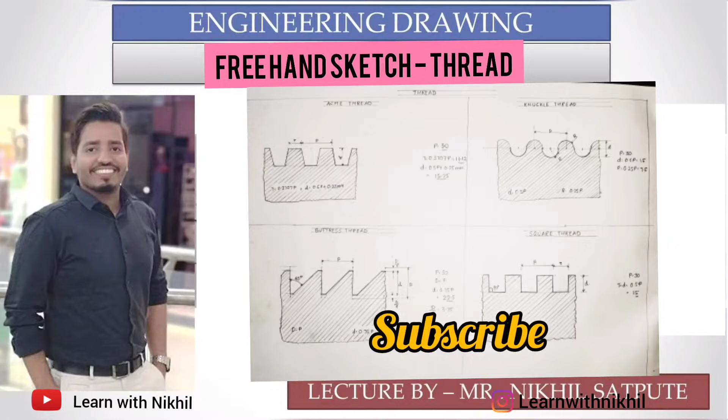So here we are going to draw a freehand sketch, and in that we are going to draw threads. First is Acme thread.

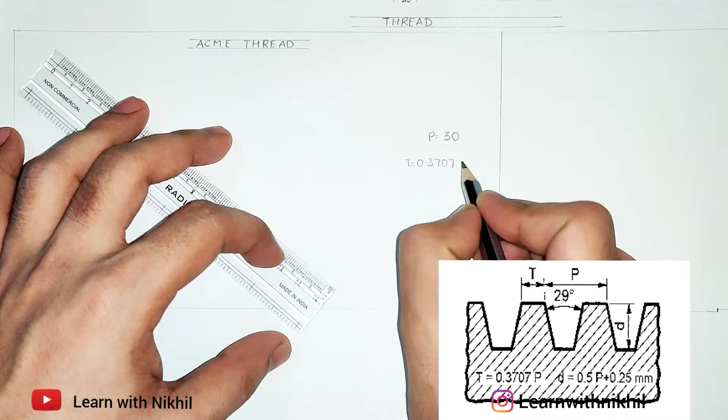First we'll find out the values. The image shows P is 30, we have assumed that, you can assume any value. After calculating T, that is 0.3707 P, it will be 11.12 millimeters, and small d, that is 0.5 P plus 0.25 mm, will be equal to 15.25 mm. So we have assumed P and calculated the other values.

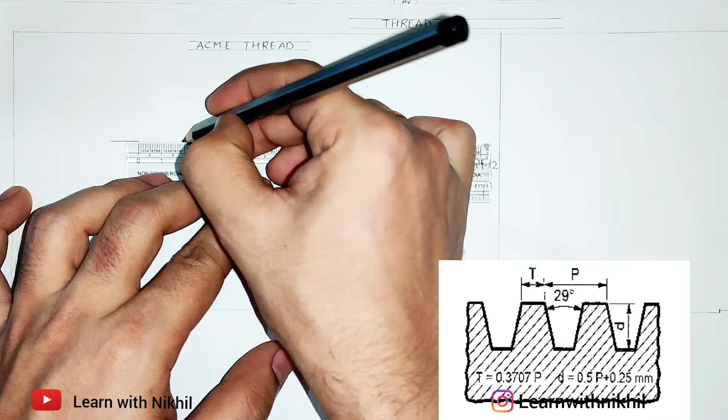You can assume P as 20 millimeter, 40 millimeter, anyhow, and according to that the values will change. Now first I marked a line T, which we calculated as 11.12. Then from T we marked a point at distance P, that is 30, and again marked a line of T. So these two lines are T, as you can see in the question itself.

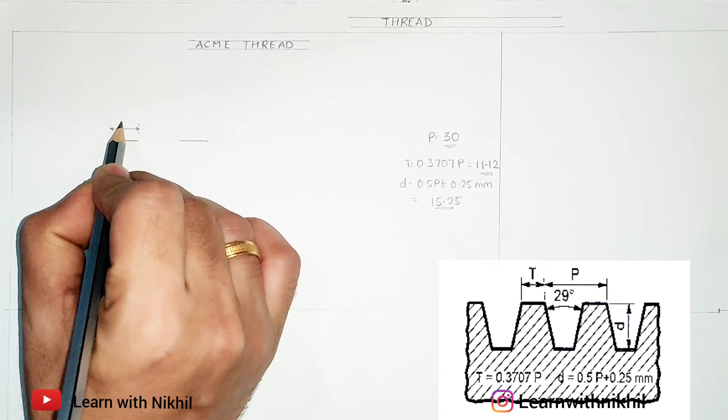So this distance is T. Till here the distance is P. So first we have marked these two distances.

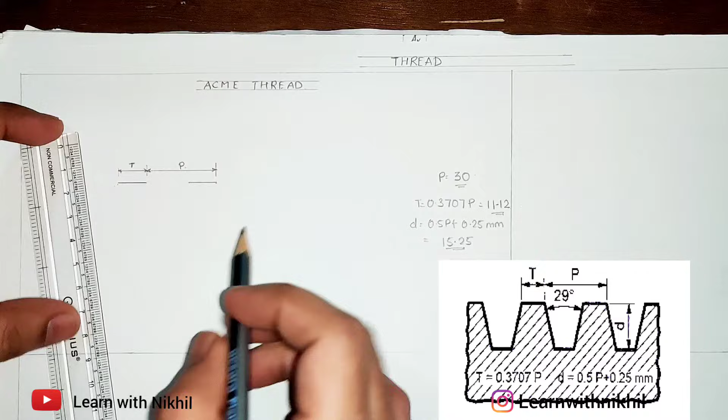Now we'll mark a distance D, which is 15.25, below this line. You can see in the question also. So I've marked a point, and now I'll draw a parallel line through it.

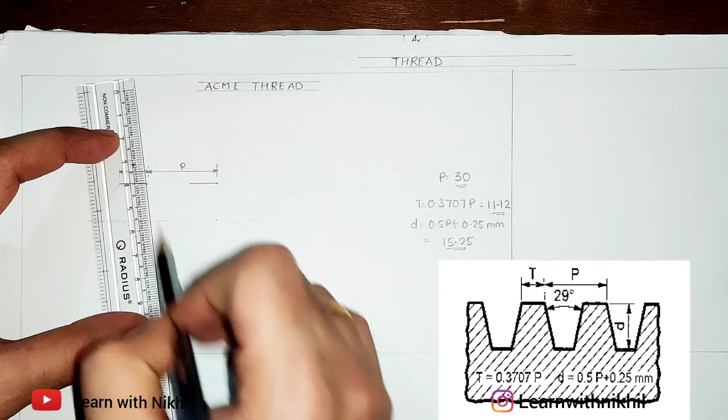Now we have to draw an angle of 29 degrees, V shape. So first I'll mark a center point of this, and through that center point I'll draw a straight line.

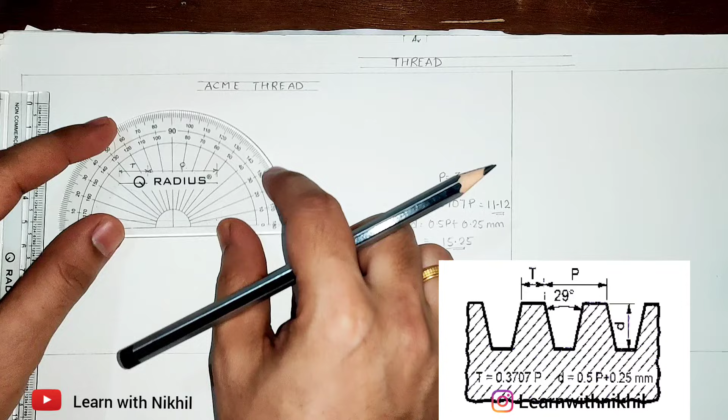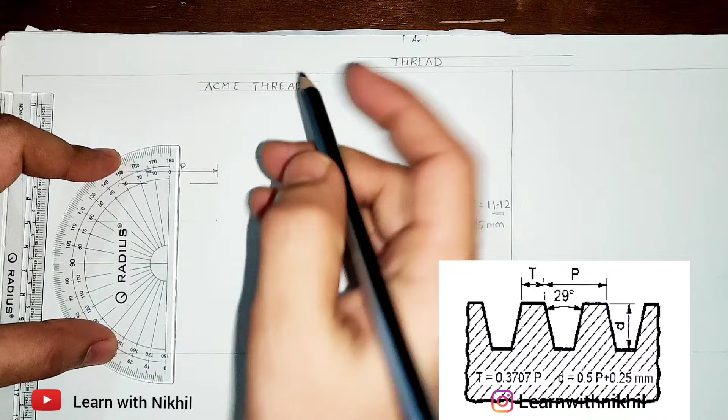We have to draw an angle of 29 degrees, so 14.5 degrees on both sides will give me 29 degrees. I'll just place the protractor like this. You can place it so you get the angle 14.5 on both sides. The top part I am aligning to 14.5 degrees, as you can see.

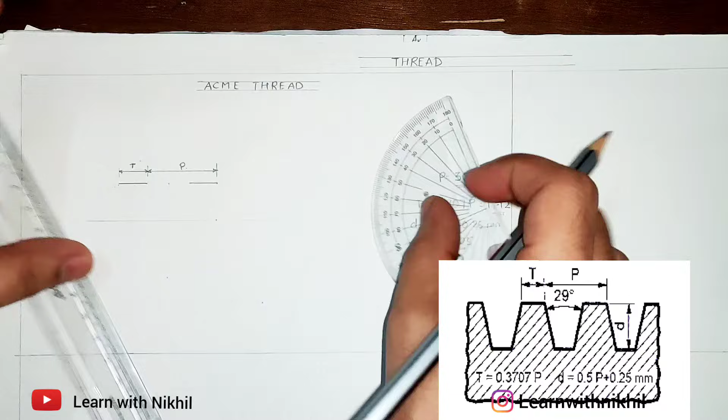Once that degree is achieved, I'll mark a point. I'll note the center point also of the protractor. This is the center point, so I'll mark it there, and from there I'll draw a dark line joining till this distance D. I'll do the same on the other side.

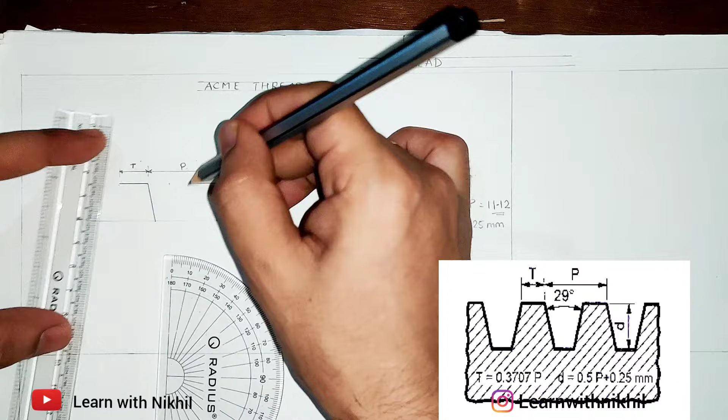Now we have the center point, so directly I'll mark the angle 14.5, joining this. Given the angle, the bottom part I'll join, and this groove we have got.

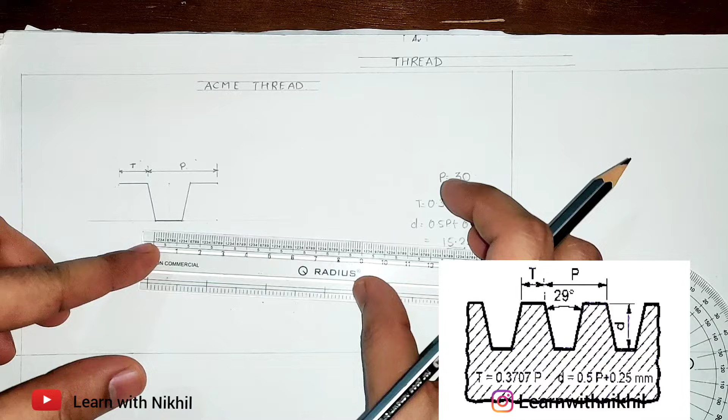Same way we'll construct it on the right side and on the left side as well. Now you don't have to calculate the degree again, we'll just find out the distance and replicate it on both sides. So this distance is around 16 or 17 millimeters, as you can see.

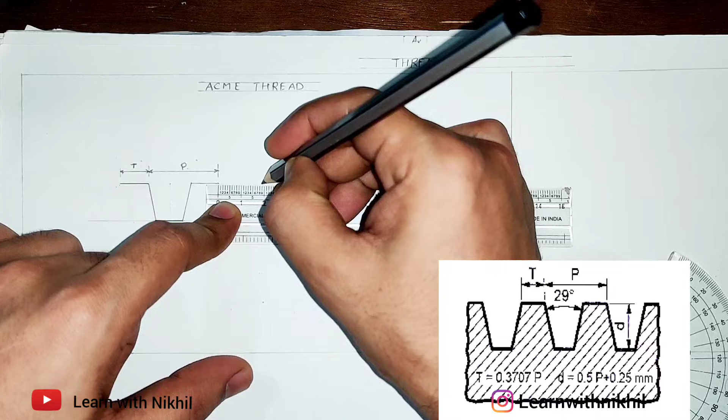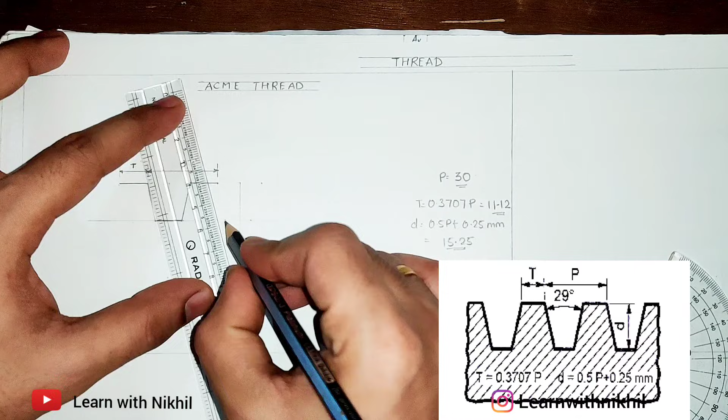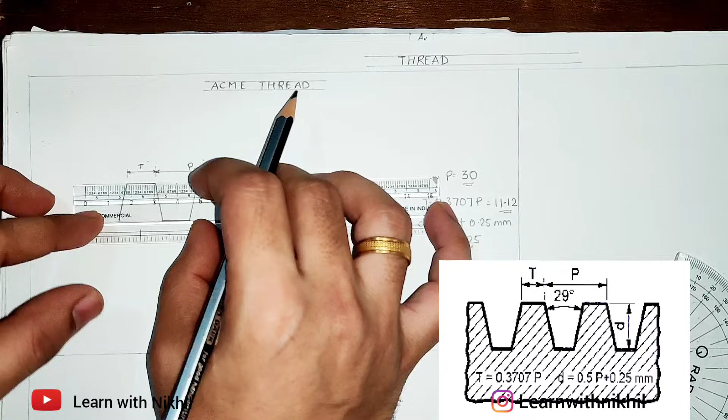So this is how, once you create the angle, just through the distances you can recreate this. Now we'll do the same on the left hand side as we did on the right side. See this distance, mark it over here, mark the center point, join this.

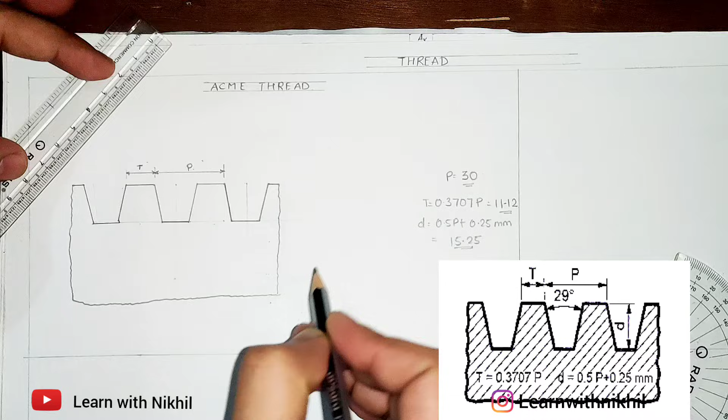Now creating the outer surface, which is an uneven surface. It is an extended surface, so we are just marking it like this. This distance is small d, and we are done. Just write down whatever is given in the question, same as you have to draw.

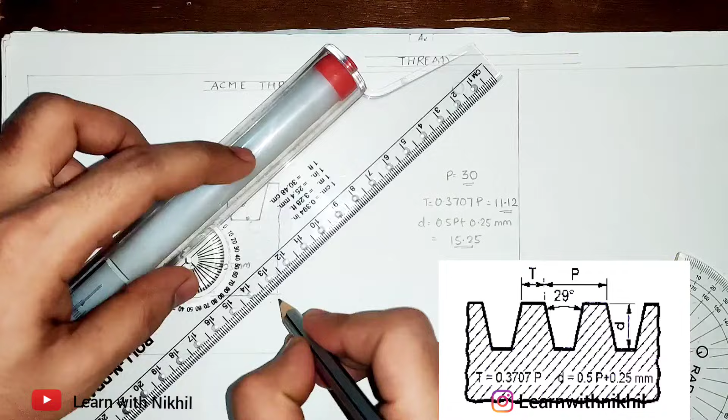Now this slant line I have taken at an angle of 45 degrees. Just see how consistently I am drawing it, the gap should be the same, and we are done with this figure. Next is knuckle thread.

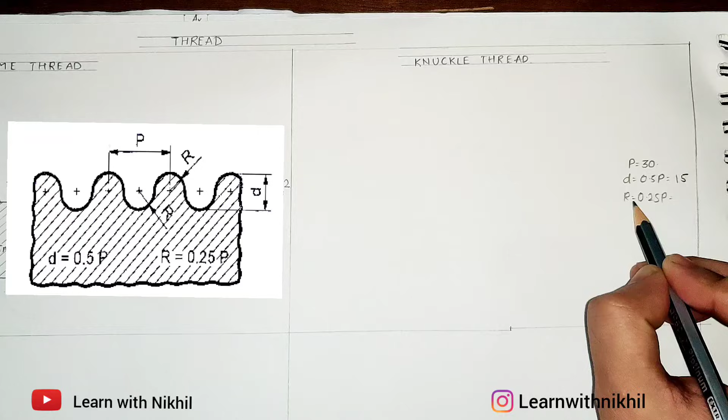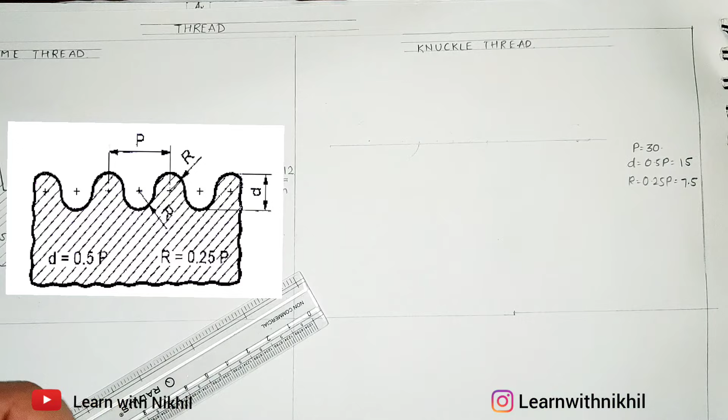We have the dimensions P is equal to 30. D we have calculated, and R we have calculated using the formulas. Now I'll just show you the shortcut method to draw this. First we'll draw a straight line.

Now on the compass we'll take a distance of R, that is 7.5 millimeters. I'll keep it on this line, and anywhere on this line we'll draw the semicircle on the top side. Where it ends, from there I'll mark a center point, and from that center point draw the semicircle downwards. Where it ends, mark the center point again, draw the semicircle upwards. So like this, continue drawing.

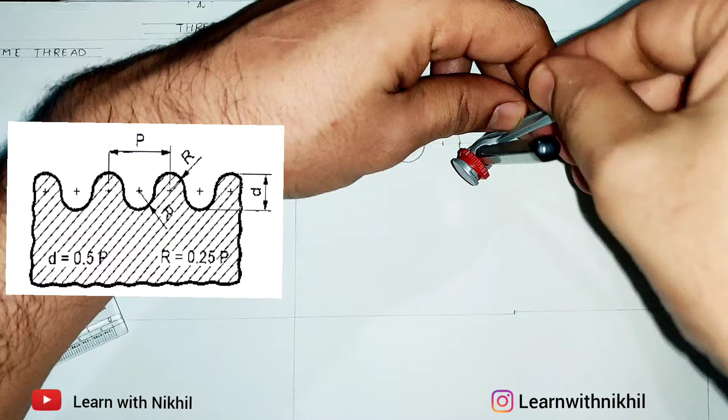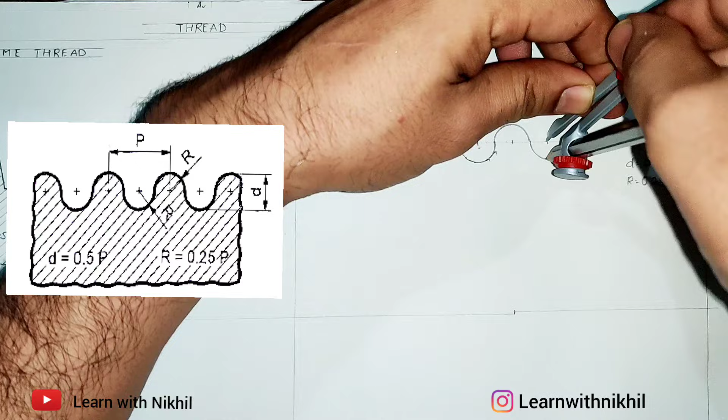So we don't need to draw P or D separately, they will automatically form if you do this correctly. So 7.5 millimeters radius semicircle we have created. After creating this, you can check the value of P and D, it will be the same which we have calculated.

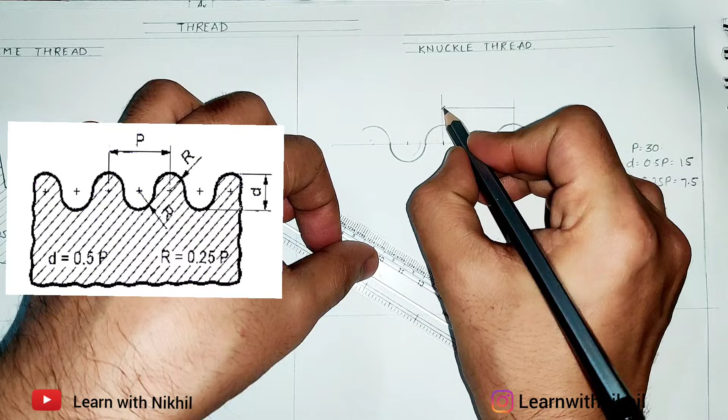So P value is 30, as you can see, it's already there. The height D is already there, which we have calculated. So this value is P, this is R, that is 7.5 radius, this is also R, and this height is D.

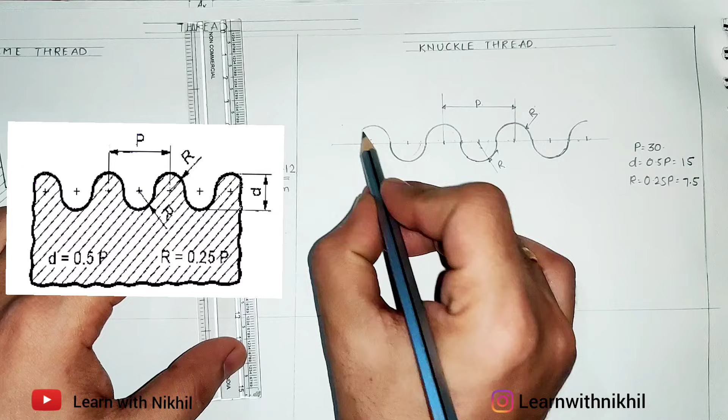Let's draw the last semicircle, then draw this uneven surface. As it is extended, there is no end to this, so we have drawn it like this.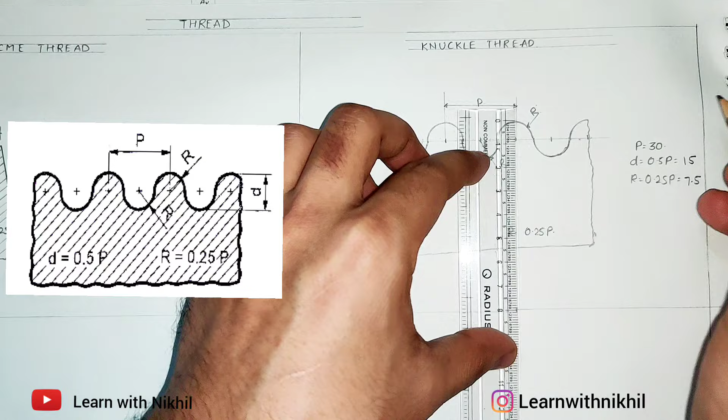Now D value is 15 millimeters. You can see it is exactly 15 millimeters. I'll just mark it. You just have to draw the radius of 7.5 and you will get the other dimensions automatically. Again drawing this 45 degree sectional or hash lines. See how consistently I am drawing, the gap should be same. So with this we are done with the knuckle thread.

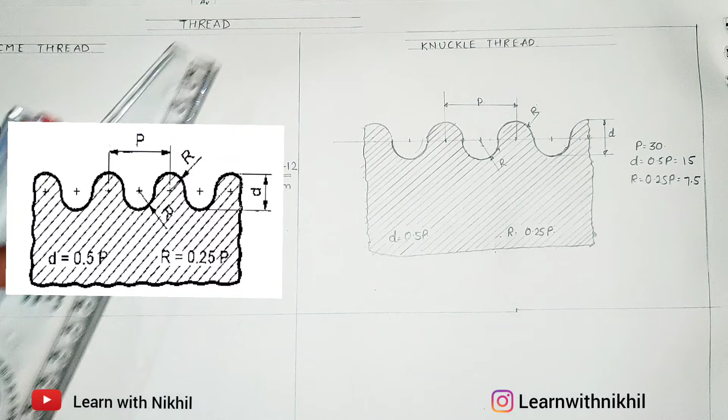Next we'll draw buttress thread.

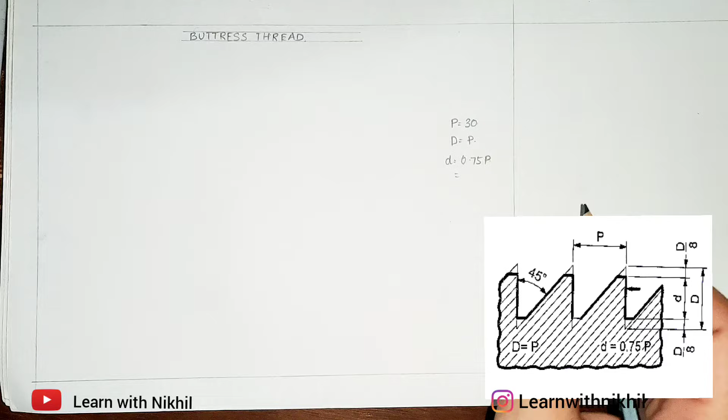Again its values: P we have assumed 30, D is equal to P, small d is equal to 0.75 P, which gives us 22.5 millimeter, and D by 8 is 3.75 millimeters.

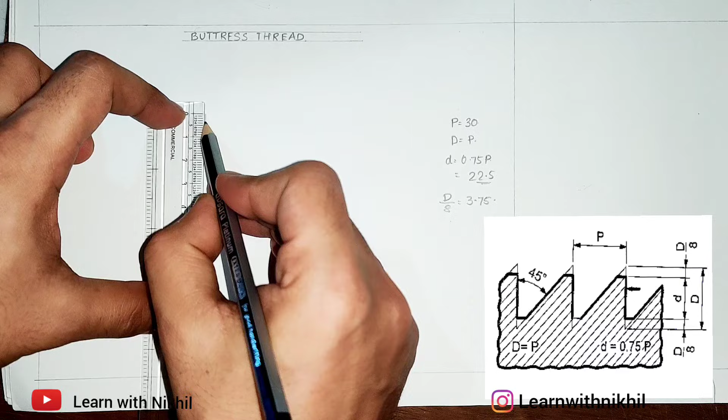So for drawing this, first as you can see in the question, D by 8 value is 3.75. First we'll mark 3.75, lightly. After that the value is small d, that is 22.5, so from here we will mark 22.5 downward, that will be dark, and after that below again D by 8, that is 3.75, that is light.

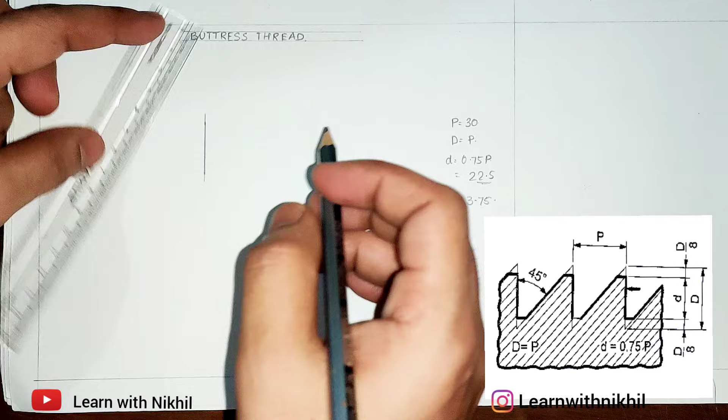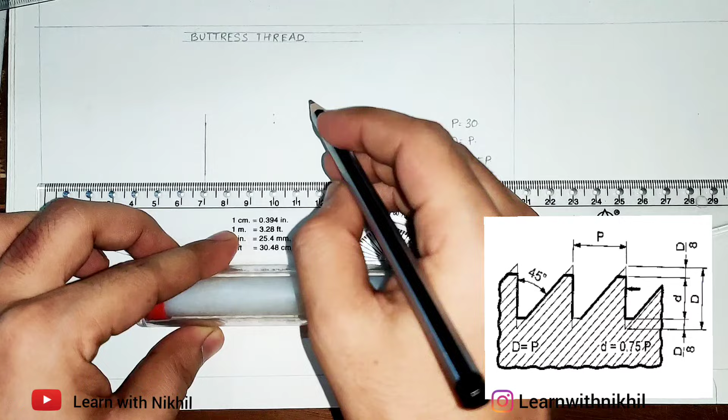Once we have marked this, same we will project it at a distance of P. P is 30 millimeters, so I'll mark a point 30 millimeters on the right side. From there I'll just project the points. This point I'll project it there. So same line we will create it 30 millimeters apart.

Same line, this will be light, D by 8. This will be dark, small d. Then again D by 8 light. Now these two lines have been created. Now we have been given an angle of 45 degree.

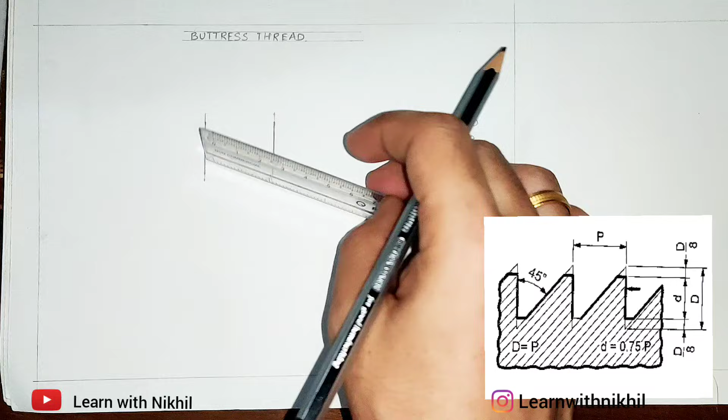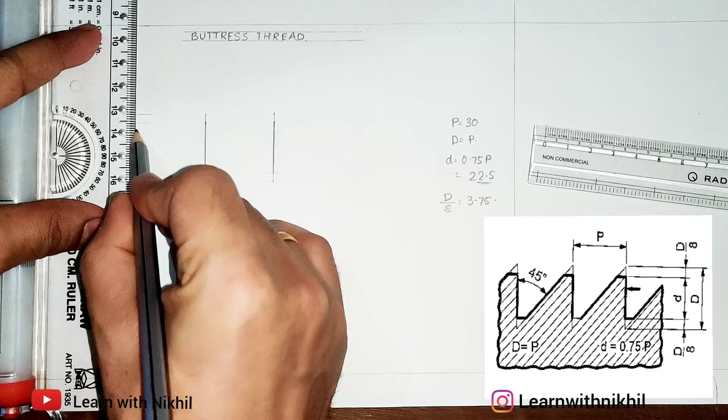So from here we have to draw an angle of 45 degree. Before that, I'll just replicate one more line on the left side also. See how I'm projecting these points on the left side. Then taking parallel on this line, this will be light, dark and light. Now 3 lines we have drawn.

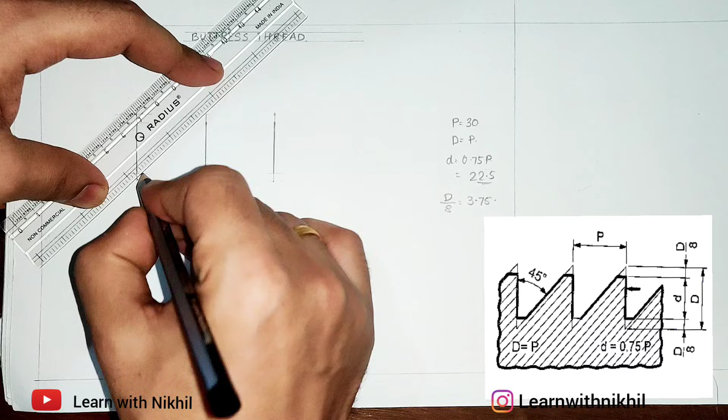Now I will take an angle of 45 degree, keeping the protractor like this. Angle 45 degree I have marked. Joining this, but see how the join is there in the question, only this part is dark. Then join like this, join like this. So 45 degree angle automatically forms.

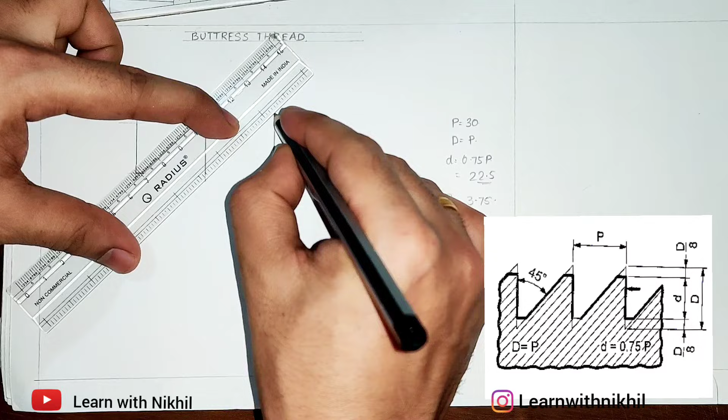So from here again I will show you 45 degree angle. It automatically joins here. We'll draw this part, make this part dark, then join this and this. Same you can do it on the further side also.

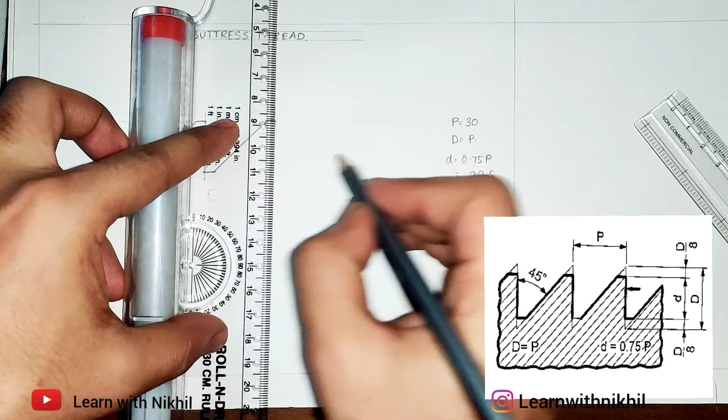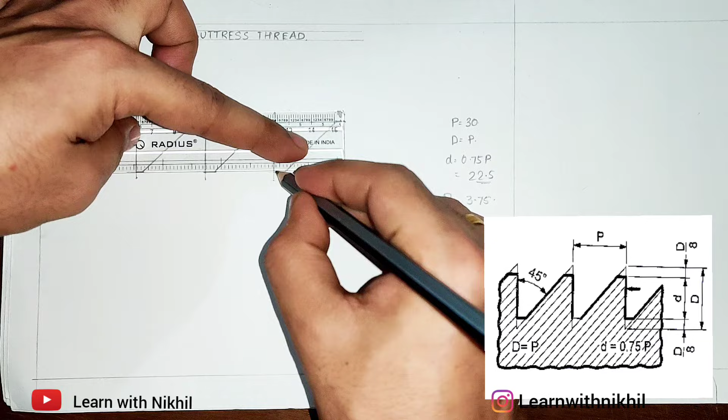I've marked 3 cm, that is P. Taking this line parallel here and projecting the points. Mark the points, this is D by 8, this is small d, and again D by 8. Same thing, keep the scale like this. Make this part dark, join this and the bottom side this. So this is the buttress thread.

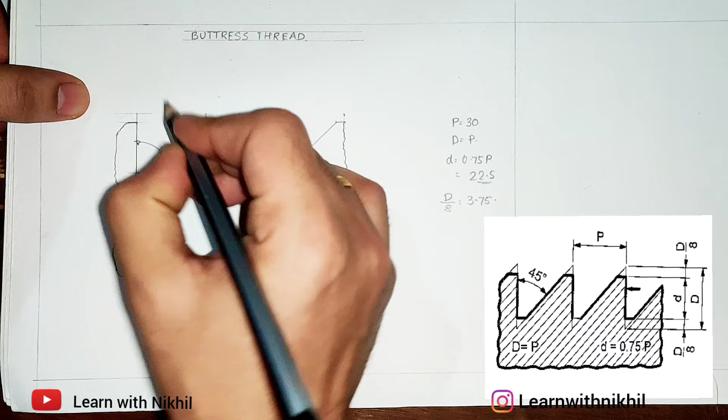Now completing the remaining part. Again, this is a continuous section, so to show it we are drawing like this. This angle is 45 degree. This distance is P, which we have assumed. You can assume the distance anything like 20, 40.

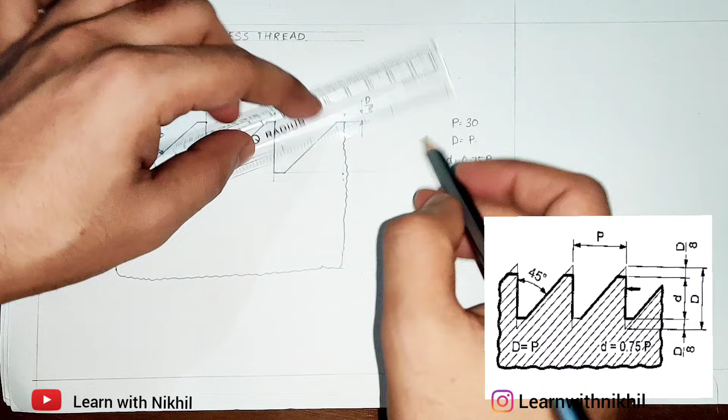According to that, the distances will change. This distance is D by 8. So whatever you assume P, according to that, the other dimensions will also vary. I have assumed it 30, you can assume it 40 or 20 as well. This distance is capital D, you can see it automatically comes to 30 millimeter. This is D by 8.

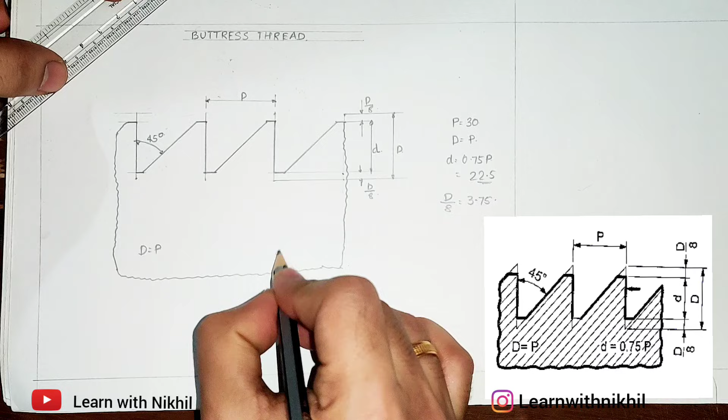Now completing with the remaining part, the section lines, and we are done. So we have drawn the buttress thread.

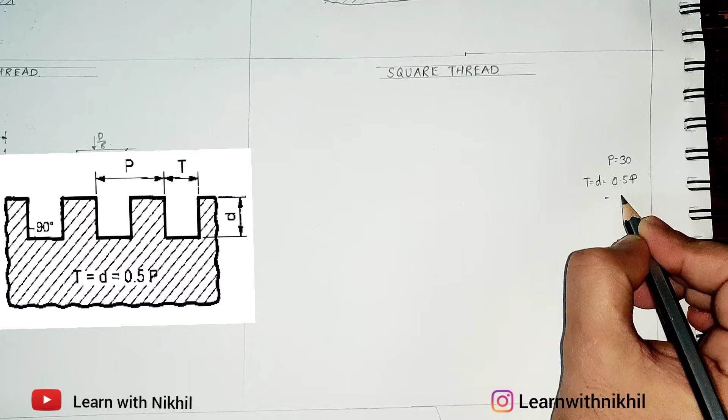Last is square thread, this is the simplest one. Again P we have assumed it 30. T is equal to D is 0.5 P, which is 15 millimeter. So we will mark the points 15 millimeter apart.

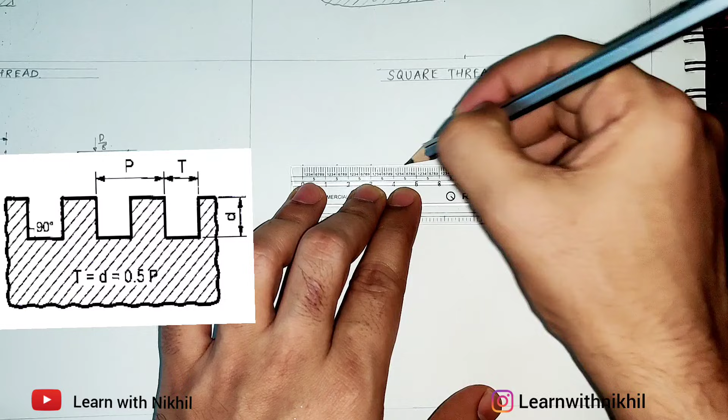So each square is of width 15 millimeter. I'll mark the points 15 millimeter, 15, 30, 45, 60, 75. We have marked the points. Now through those points, the height D is again 15, so I'll mark a point 15 below.

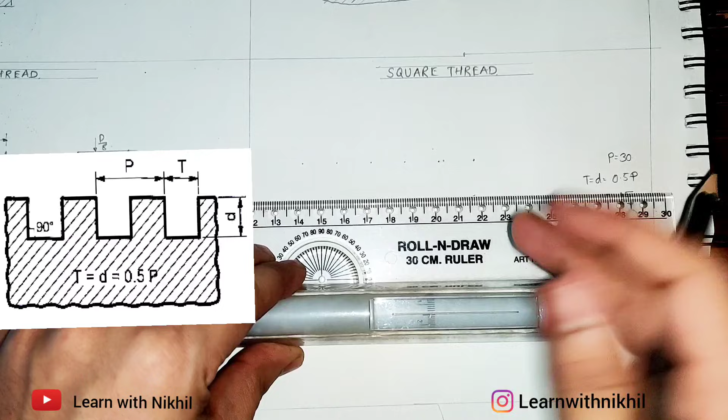Then through these points I'll draw a parallel line below, I'll draw it lightly. Now I'll draw straight lines through them. You have to create the square thread. So joining these lines dark. The gap is 15 millimeter.

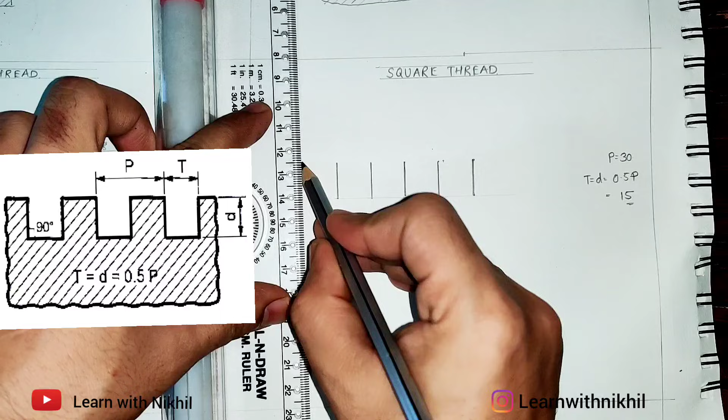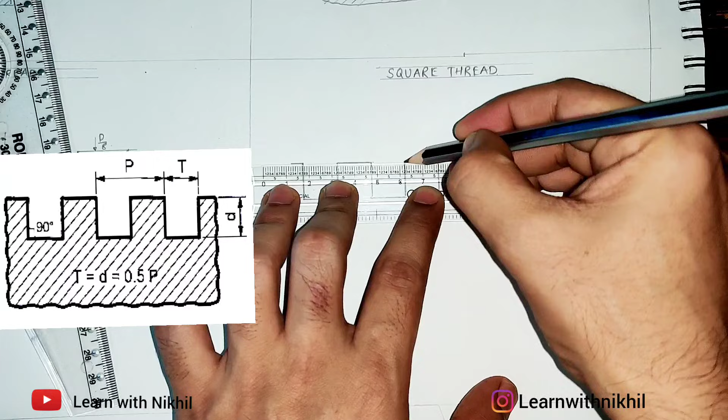Now this is like a zigzag shape, so downward you can see I'll just join this dark alternative, and the upper side will be the zigzag way. So opposite of that, extend this, join this and join this, and extend from here also. Again you have an uneven surface and an extension, so we are drawing these lines.

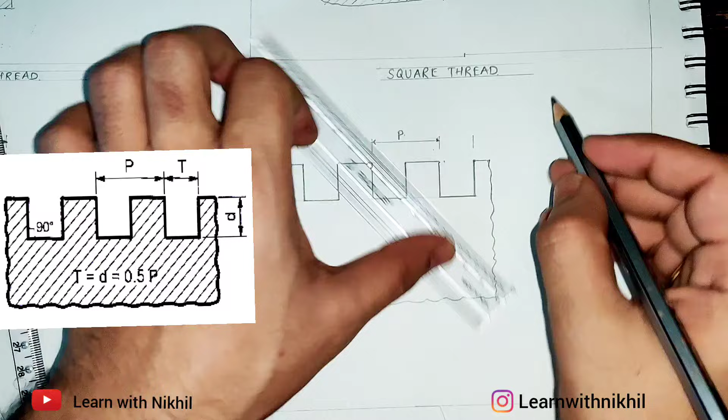Now this distance is P, this is T, 1.5 centimeter or 15 millimeter. This height is D. T is equal to D is equal to 0.5 P. This angle is 90 degree.

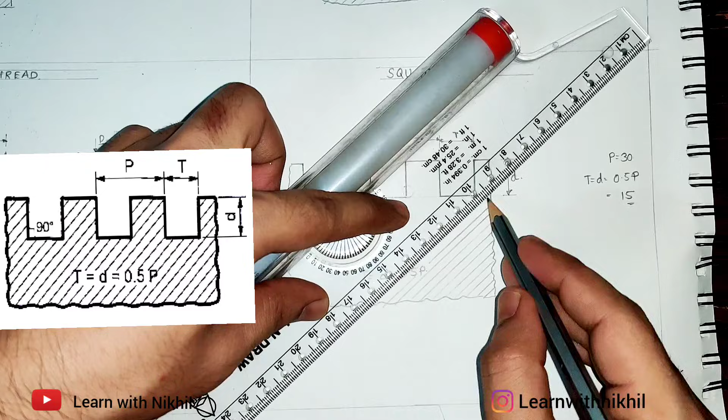Joining the section lines or hash lines, and we are done with the figure. So these are the threads.